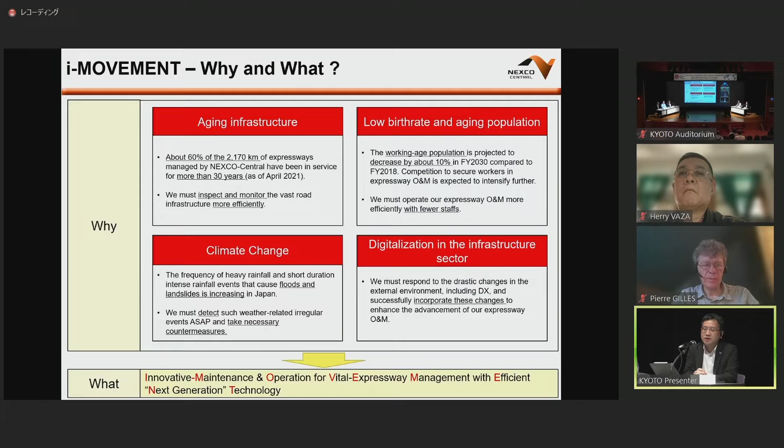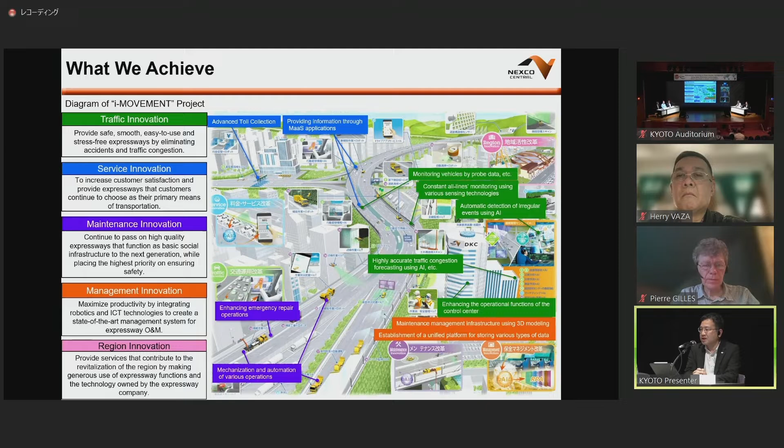This is related to the operation, including tolls of the highway, and we want to have a comprehensive transformation of the operations on highways and roads. So what's the future state or vision? It's a rather busy slide, but on the left side we are working on traffic innovation, service innovation including tolls, maintenance innovation, and management innovation. Hopefully we will have a ripple effect on the regions around the highways and roads, and that's what we want to achieve under I-Movement.

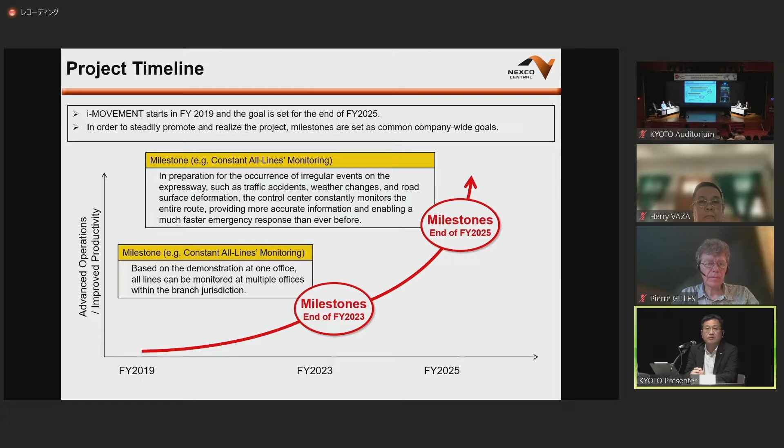All the initiatives in different areas have milestones, and we actually started working on I-Movement from FY19. By the end of FY2023 and 2025, we defined milestones such as constant all-lines monitoring. We set specific milestones to achieve by 2023 and 2025, and that's how we are working on this project.

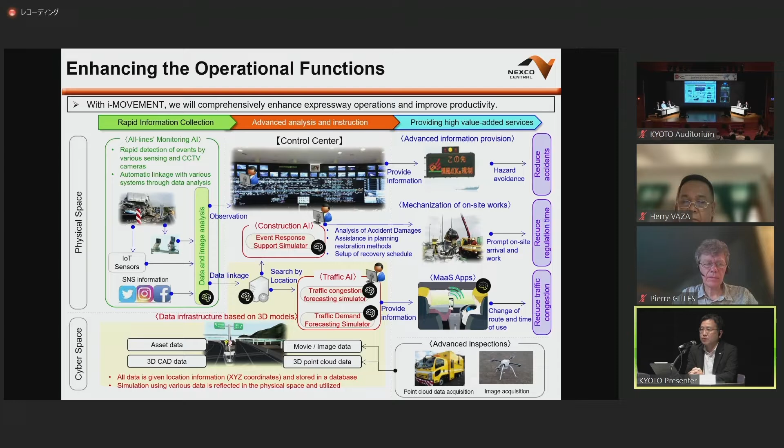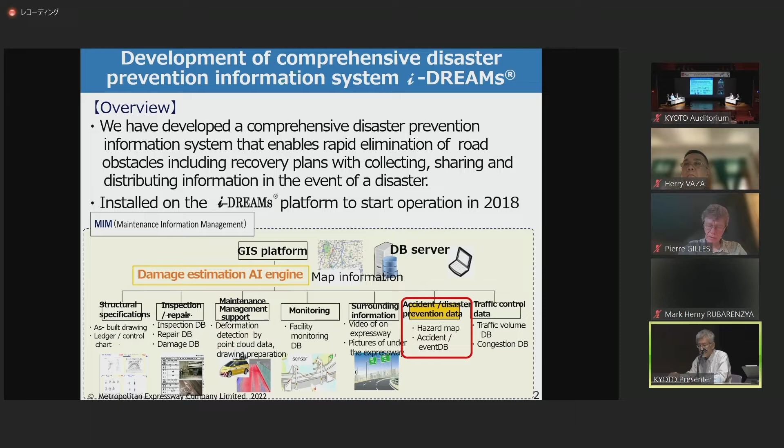Within the 2D management of i-DREAMs, as you can see in the red box, there is a comprehensive disaster prevention information system that stores accident and disaster prevention information. Sharing and dissemination of the information are done in order to achieve prompt opening of the affected roads. This shows the basic information and real-time information we have in this system.

Basic information is divided into four major categories: priority roads, risk areas where a road surface step could happen, the resistance status of surrounding buildings, flooding risk areas, emergency equipment deployment points, and earthquake information.

And there are five major types of real-time information. Later, I'll show you the video, but basically we can check the inspection progress, confirmation of local conditions, confirmation by video, and also mobile device information.

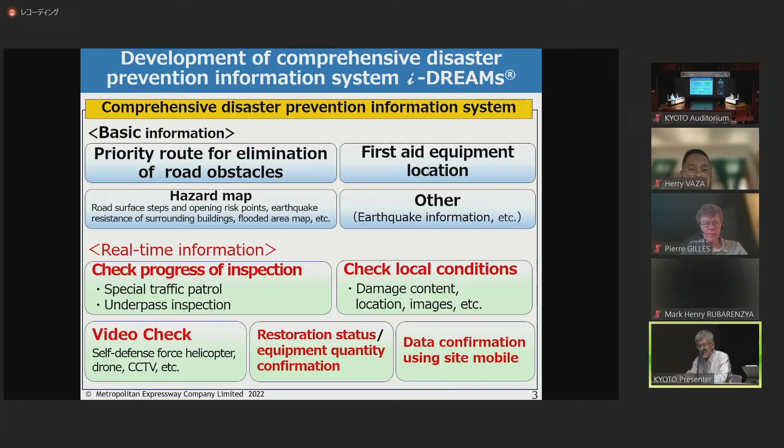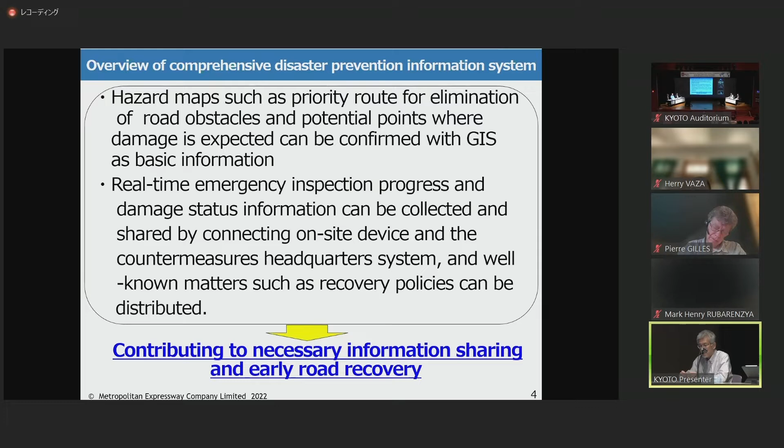By applying this comprehensive disaster prevention information system, it becomes possible to confirm hazard maps such as priority routes for road reopening and road surface step risks using GIS. In addition, by connecting on-site terminals to the system at headquarters, we can share real-time information and check the progress of inspections. This will contribute to prompt road reopening, including restoration planning.

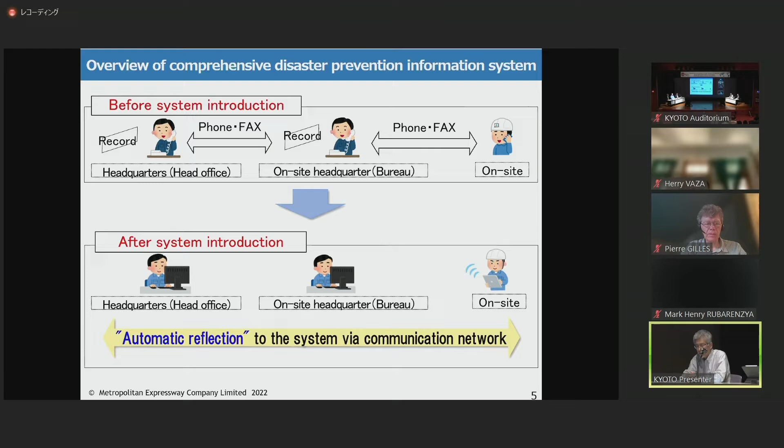This slide shows a simple comparison of before and after the introduction of the Comprehensive Disaster Prevention Information System. Before, we were using telephone and fax, but now we have the system in place, hooked onto the internet. So the same information can be shared instantaneously, and the information is synchronized.

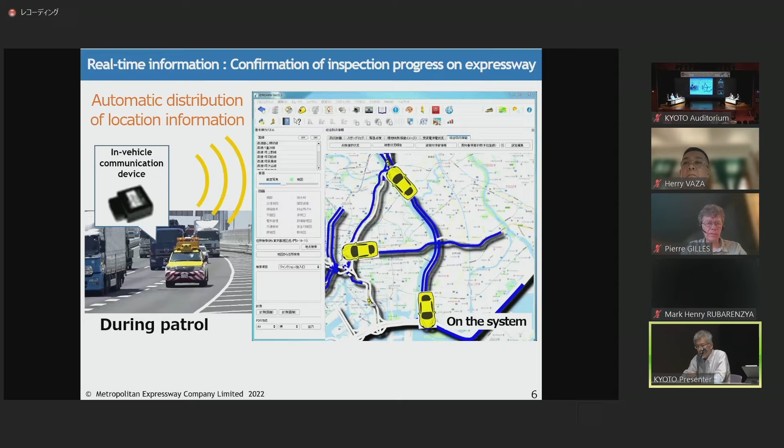So this is a movie showing the progress check of the inspection, a real-time confirmation. On the left is the vehicle, which is the communication vehicle, and the location information is disseminated, so on the map we can tell the progress of inspection work.

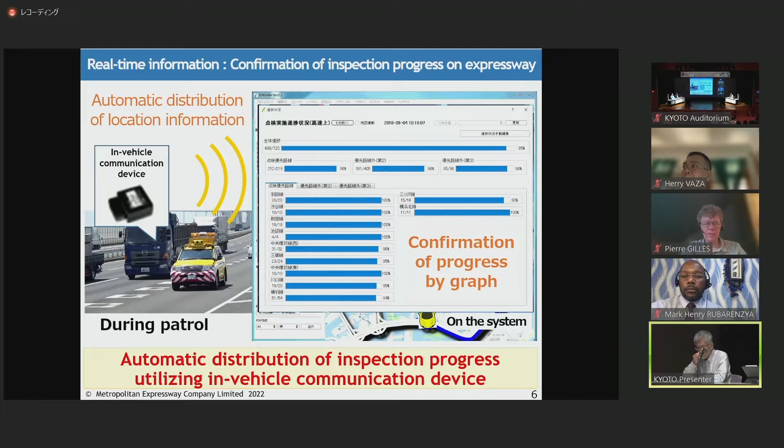Therefore, the delay can be detected, and once the work is completed, we can know that instantaneously, and swiftly we can reopen the road.

This is the same real-time information for structural damage check. The inspector enters the information of the damage, and on the system, as you can see on the right, it is instantaneously reflected. Therefore, accurate information from the site is shared at the headquarters. Next, please.

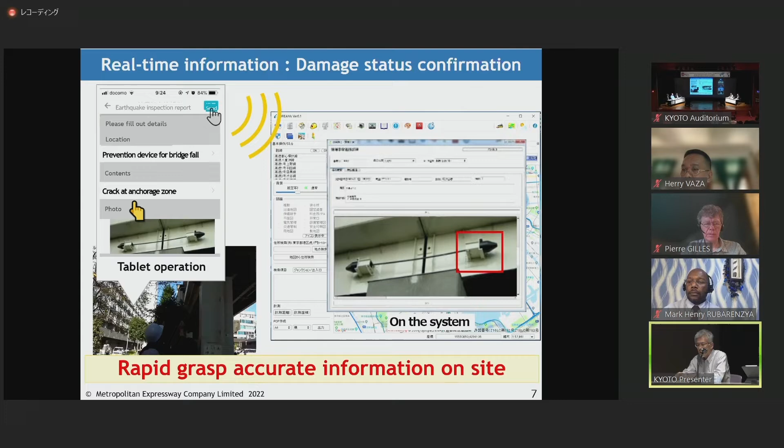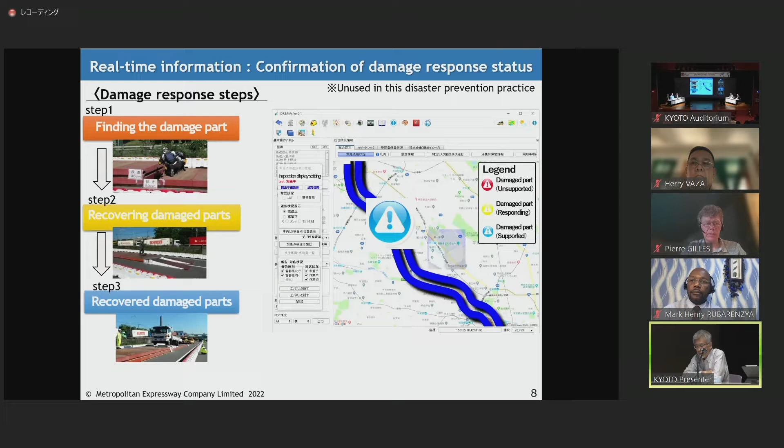This is the real-time information of the damage, same as previously. At each step, the information can be shared. Step 1 is discovery of damaged areas. Step 2 is the status of restoration work. Restoration of damaged areas is step 3.

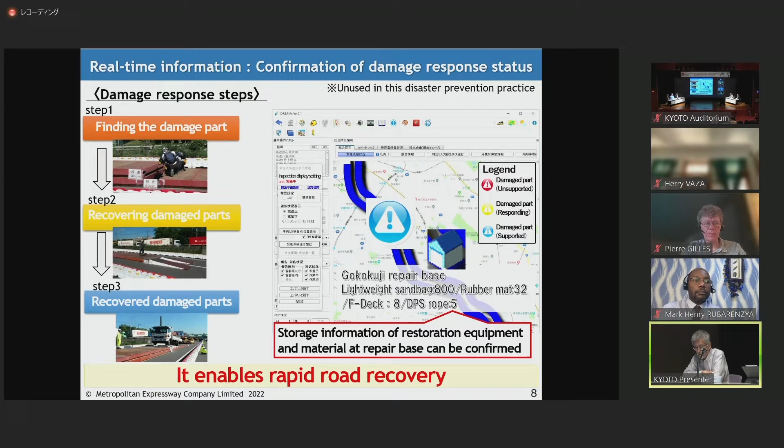So we can tell exactly where we can start the operation of the road by looking at the data.

This is just for your reference. The picture on the left is the real-time image from a drive recorder, so the patrol cars can send you information about damage on the road, and we can get such information very quickly.

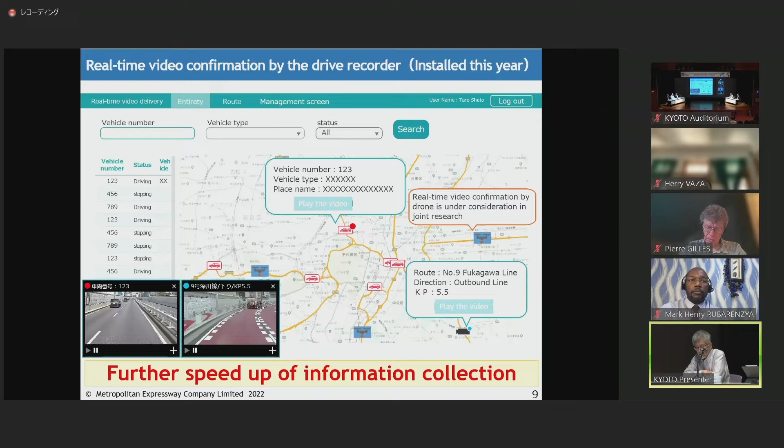This is one such example, also for your information. As has been introduced, drones are now being used. In the metropolitan areas it is difficult to use drones, but we now have a real-time image confirmation system, and we are doing joint research on this.

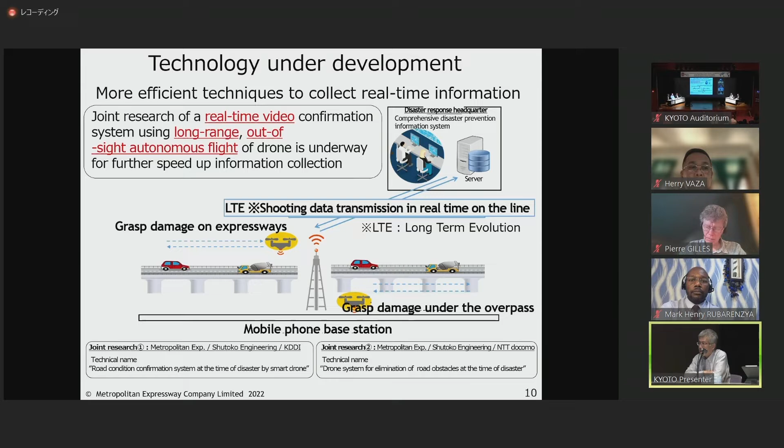The Metropolitan Expressway is designated as a relief lifeline, and therefore we have to improve road availability so that it can serve as an emergency transportation route.

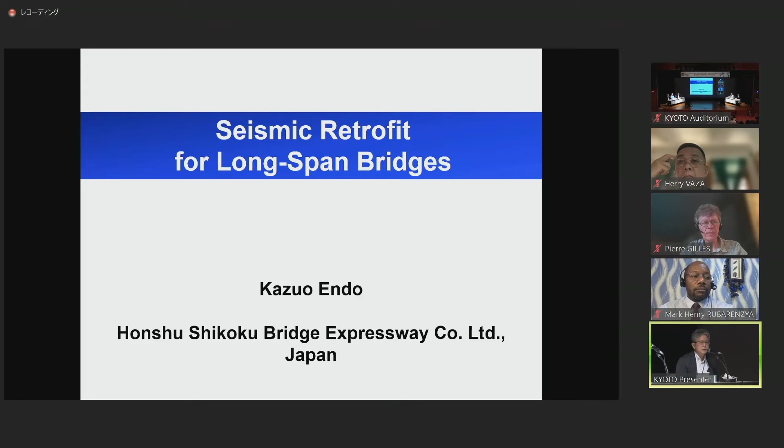My topic today is seismic retrofit for long-span bridges. Next slide, please. This slide shows the outline of the Honshu-Shikoku bridges, which our company operates and maintains. There are 3 routes between Honshu and Shikoku Island, composed of 17 long-span bridges, like Akashi-Kaikyo Bridge, upper right photo, and Tatara Bridge, lower left photo.

This bridge and the middle route are called the Seto-Ohashi bridges. This route is dual for highway and railway, while the other two routes are only for highway. These bridges were constructed step by step, and all three routes were completed in 1999, more than 20 years ago. The blue figures in the yellow boxes indicate the traffic volume, daily average, in last year. As you can see, the east route, Kobe-Naruto route, has the highest value, the middle route comes next, and the west route is the last.

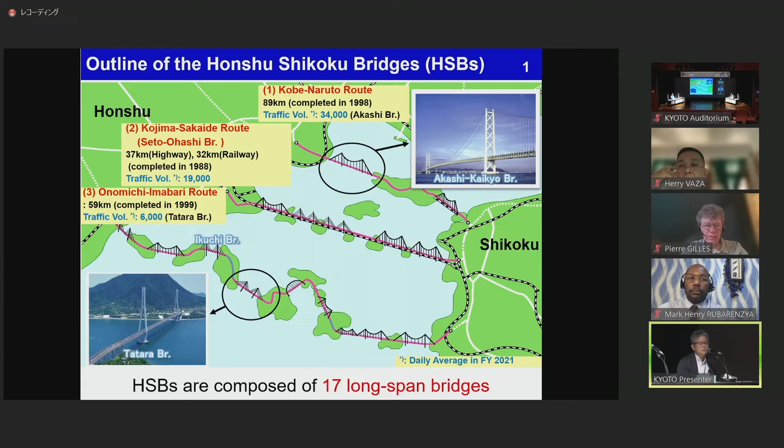Next slide please. This is the background of seismic retrofit. The Kobe earthquake in 1995 caused severe damage to many road bridges. After this earthquake, the Japanese seismic design code for highway bridges was revised drastically, and we were required to consider a strong inland earthquake like the Kobe earthquake.

But most of our bridges were designed before the Kobe earthquake, so we didn't consider inland earthquakes for the original seismic design force. According to the latest seismological evidence, seismic load exceeding the original design was estimated, so we can say that seismic risk is increasing.

The other point is the importance of our bridges. Of course a road bridge is important infrastructure, but especially our long-span bridges connecting interchanges across the straits are highly important because there are no alternative routes between the two islands. Our bridges are expected to act as a lifeline network for emergency transportation or restoration works after a large-scale earthquake. So under this background, we launched seismic retrofit work, and it's now underway.

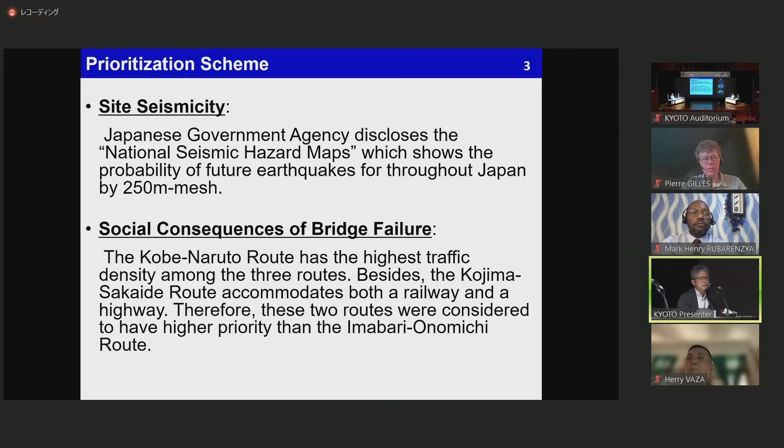Next slide please. Based on the prioritization scheme, the current seismic retrofitting strategy is as follows.

Next, I'd like to show you some examples of seismic retrofit of our long-span bridges. The first example is the case of steel truss bridges on the Seto-Ohashi bridges. The upper middle picture shows a cross-section of the girder, which is a double-deck structure: upper deck for highway and lower deck for railway.

The seismic vulnerability assessment shows that the middle chord, the red-colored member above the railway, got damaged. In order to secure safe railway operation, we needed to avoid reinforcing these members. So we adopted a seismic retrofit method and replaced the existing steel bearing with a new isolation bearing.

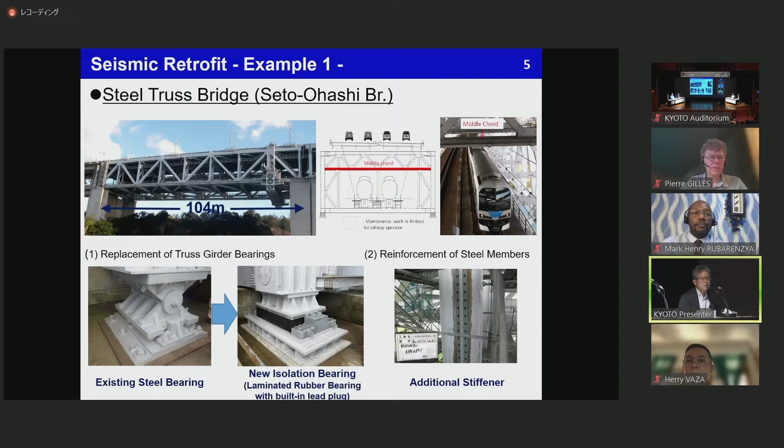Next, another example is a cable-stayed bridge with a main span of 490 meters. In cable-stayed bridges, how to control the girder movement in the longitudinal direction, like the upper right mode shape, is very important for seismic design. So we installed viscous dampers, like the lower left photo, to decrease the girder displacement through energy dissipation. We also applied carbon fiber sheet jacketing to increase the shear strength of RC piers.

As you can see, there is no general seismic retrofit method. We need to examine the seismic behavior of each bridge carefully and find the best solution on a bridge-by-bridge basis.

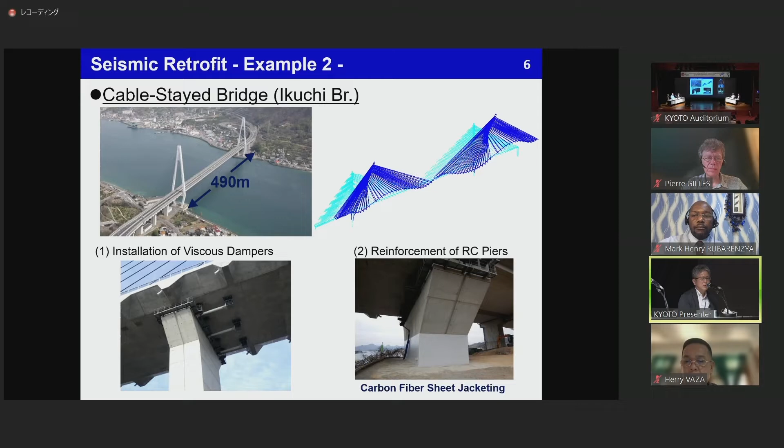I'd like to summarize my presentation. Past seismic events, such as the 1995 Kobe earthquake, caused severe damage to road bridges in Japan. It resulted in closing of road networks, which led to traffic delay as well as indirect economic losses.

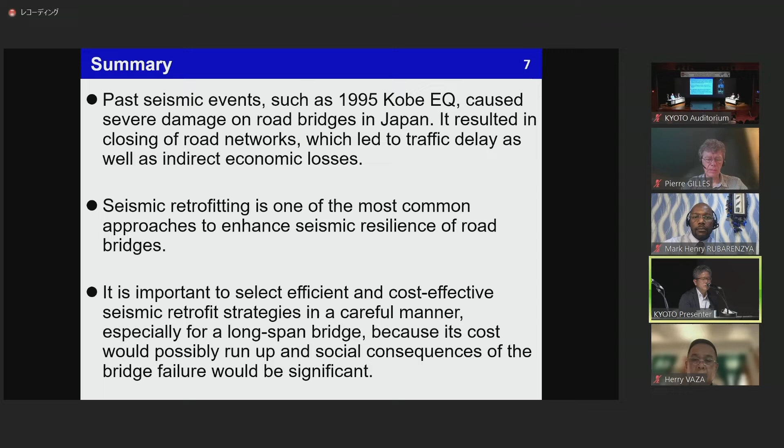The second point is that seismic retrofitting is one of the most common approaches to enhance seismic resilience of road bridges. It is important to select an efficient and cost-effective seismic retrofit strategy in a careful manner, especially for long-span bridges, because the cost would possibly run up and the social consequences of bridge failure would be significant. Thank you for your attention.

Thank you, Endo-san, nice presentation. At this time I need to apologize because I didn't talk about the theme of this roundtable discussion.

So the theme of this roundtable discussion is what are the strategies and the tools for disaster management or disaster resilience. We are discussing what kind of strategies and tools they have to be proud of in road disaster management. Now we've finished the three proud technologies and strategies of the Japanese highway companies, so now we'd like to have another strategy and tools from Indonesia.

So Herry, are you ready for the presentation? Yes, I am. Okay, so please.

Have you seen my paper? It's coming. It's coming but not yet. Okay, not yet? Not yet. Okay Herry, could you shut off your screen sharing, okay. And yes, we'll do it. Okay, thank you. Yep.

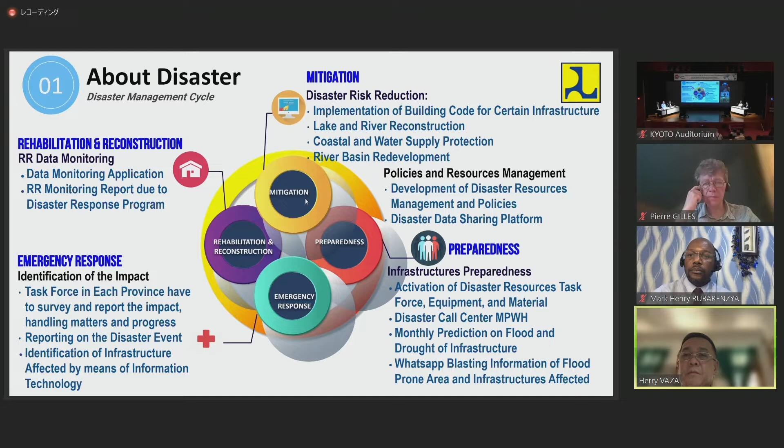There are 5 stakeholders related to disaster in Indonesia. First is Ministry of Energy and Mineral Resources, who have information about landslide, volcano and seismic data. Also we have LAPAN, the National Institute of Aeronautics and Space, responsible for imagery data. And we have BIG, the Geospatial Information Agency, responsible for preparing big data for Indonesia. The fourth one is the Disaster Management Authority, who will coordinate all the ministries and agencies when a disaster happens. And the fifth one is the Agency for Meteorology, Climatology and Geophysics, who prepare data about earthquake, rainfall, and other data.

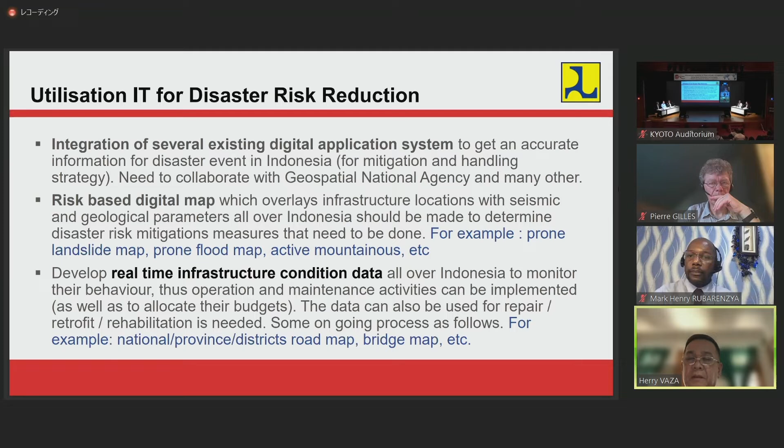Utilizing IT is important in management. First is the integration of several existing digital information sources that I talked about before, to get accurate information for disaster response. Second is a risk-based digital map, which overlays infrastructure location with seismic and geological parameters. Third is to develop real-time infrastructure condition data all over Indonesia to monitor their behavior, as well as operation and maintenance activity.

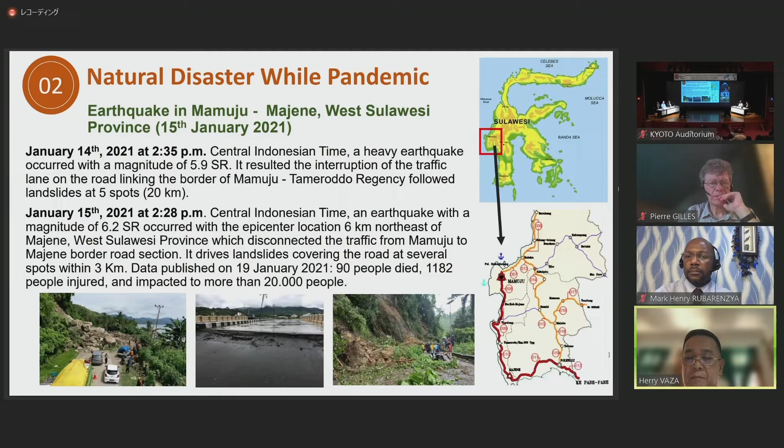During the pandemic, we had at least 2 big disasters. One is the Mamuju Majene earthquake that happened on the 14th and 15th, 2021, with magnitudes of 5.6, 5.9 and 6.2, which caused 20 kilometers of road to be damaged, affected more than 20,000 people, with 1,200 injured and 90 people dead.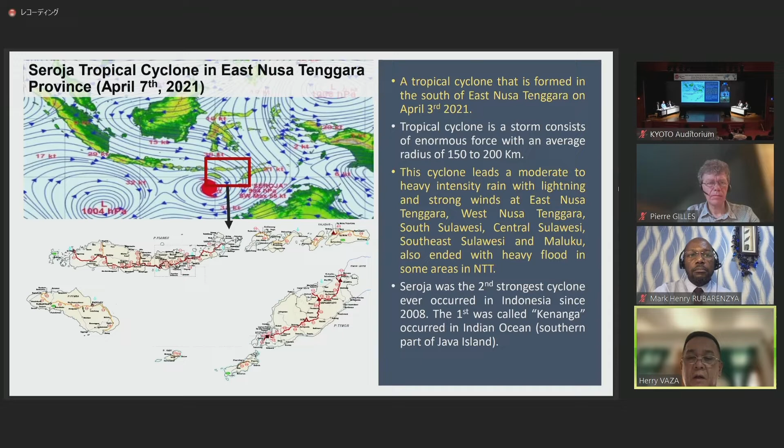After that, 4 months later, we also had a big cyclone in April 2021. This cyclone in Nusa Tenggara created a terrifying storm with high rainfall, lightning, and strong wind with a radius of almost 200 kilometers. We call it the Seroja cyclone, the second largest and strongest cyclone in Indonesia. It was powerful enough to cause about 300 millimeters of extreme rainfall per day, and hurricane-force winds at the tropical province. Floods occurred everywhere due to the high rainfall, and this cyclone affected a number of regions in East Nusa Tenggara province. According to the National Disaster Management Agency, by April 9 the cyclone had caused 208 deaths.

Our ministry is committed to completing infrastructure development to maintain the sustainability of economic activity while we are in the pandemic. We are fully aware of the importance of good infrastructure in realizing a good economic environment. The Regional Office of the Ministry of Public Works and Housing is well prepared for future possible disasters. We have certain experience during the pandemic that we cannot ignore.

We had limited movement, as you may be aware, because the government restricted movement. The second issue was a policy imposing restrictions on communication. Third was a shortage in manpower because of that, leading to slow delivery of construction materials. The fourth is the shortage of logistics caused by disconnected transportation and communication networks, which led to an absence of fuel supply. Based on these lessons learned, we propose the following for future Indonesian risk reduction management.

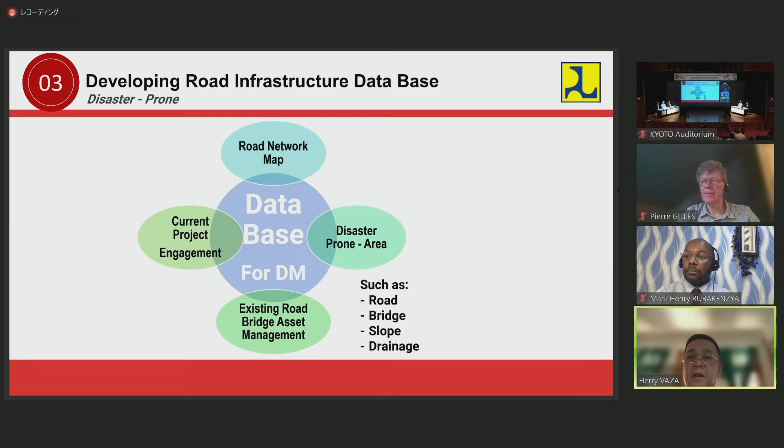We think we should collaborate between data that has been collected among our institutions. We try to build a good database in case a disaster happens.

Firstly, we should have a road network map, and also material supply data. Then we should have road operator and person-in-charge contact data for each road segment. Third, we should have a map of disaster-prone areas from the National Disaster Agency. Then we should have a road database, especially for bridge condition, slope and drainage, and also contractors who work in that area, so that in case a disaster happens, we can call them for help.

Points 6 and 7 are heavy construction equipment information, which is needed for direct deployment to the field when a disaster occurs, as well as the disaster relief unit that belongs to the Ministry of Public Works.

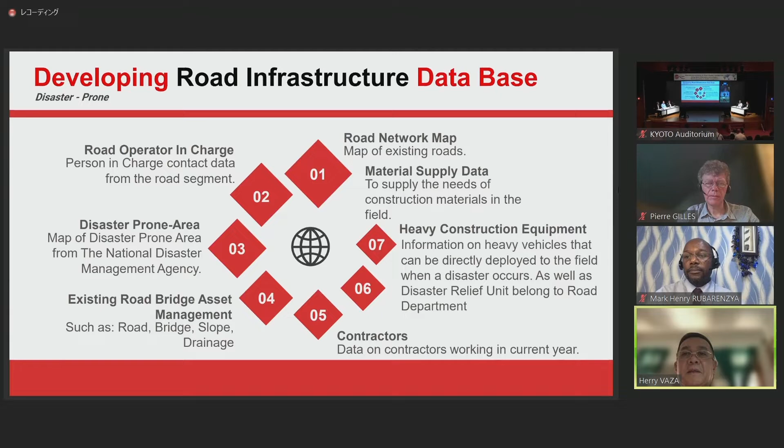Thank you. I think that's all for the future of our Indonesian scheme for road disaster management, learned from the pandemic. Thank you very much.

Thank you very much, Herry. I think the keywords of your presentation are digital technologies and the pandemic. Okay, so I would like to call the next panelist, Mark Henry Rubarenzya. Thank you very much for joining on time. Mark is the head of research and development at the Uganda National Roads Authority, and he is also the vice president of PIARC. So Mark, it's your time.

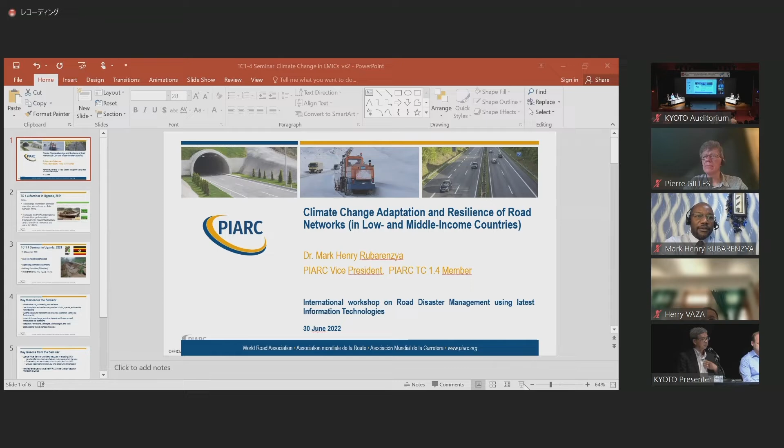I'm going to give key lessons we picked from an international seminar organized by TC 1.4, on climate change, adaptation, and resilience of road networks, focused largely on low and middle income countries. We'll cover the highlights and some tools that were presented.

The seminar had about 4 goals, but the key one was to exchange information between countries with a focus on sub-Saharan Africa. Earlier presenters mentioned the importance of sharing information with low and middle income countries, so for this seminar we zeroed in on sub-Saharan Africa.

Second was to discuss the PIARC International Climate Change Adaptation Framework for road infrastructure and identify its relevance and value for low and middle income countries, in light of the fact that this framework is currently being updated by TC 1.4. We wanted the views of low and middle income countries to ensure we're addressing their needs and that they perceive its relevance and value, which will ensure uptake.

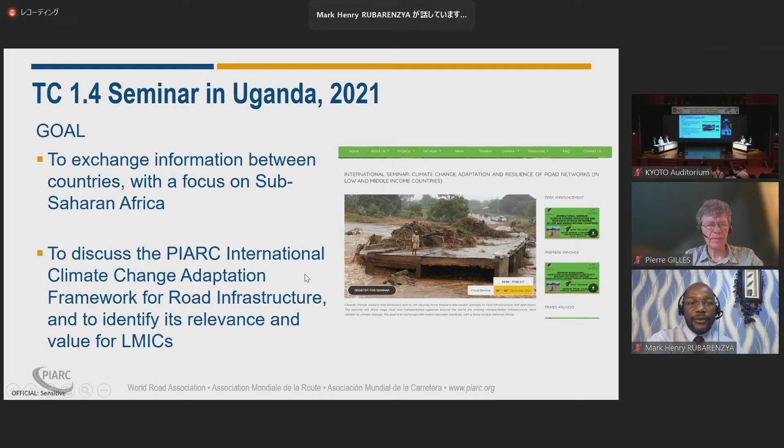The seminar took place between the 6th and 8th of December 2021.

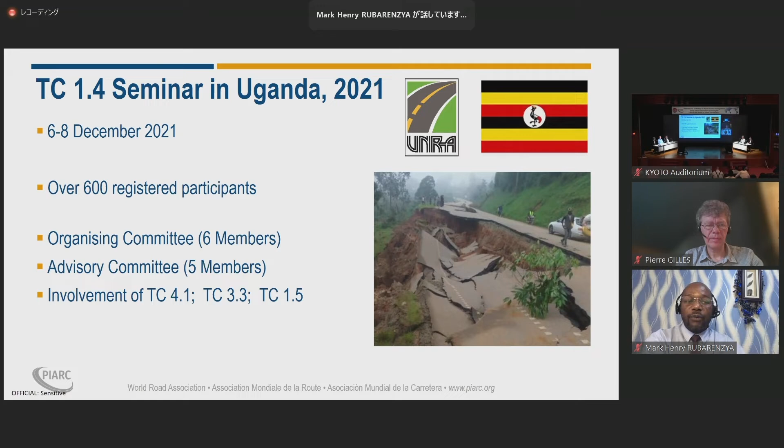It was very well attended, with about 600 registered participants, and it took some effort to organize. We had a big organizing committee of 6 members, supported by an advisory committee of 5 members, and got participation from 3 other technical committees we're very grateful for: TC 4.1, 3.3, and 1.5. So this was a truly PIARC-wide seminar.

Key themes discussed in the seminar briefly: infrastructure risk, vulnerability, and resilience; the use of adaptation and resilience approaches to build, operate, and maintain road networks; and building capacity for adaptation and resilience, focusing on social, economic, and environmental aspects — moving away from the hard to the soft, so to speak.

We looked at the impact of climate change and other hazards and threats on road infrastructure and operations, using particular case studies to see how that is realized. We looked at adaptation frameworks, strategies, methodologies, and tools — one of which was actually developed in sub-Saharan Africa through a research program there. It was good to see various frameworks and tools and the synergies, and how we could improve the PIARC one going forward. We also looked at strategies and tools to increase resilience.

So what are some of the key lessons? I'll take you through these quickly. One, the Uganda virtual seminar was considered a big success in engaging low and middle income countries. This international seminar was effective in engaging local experts from the private sector, public sector, academia, and multilateral development banks. The African Development Bank was very active, and we're happy to have reached right across the spectrum of key stakeholders in this space.

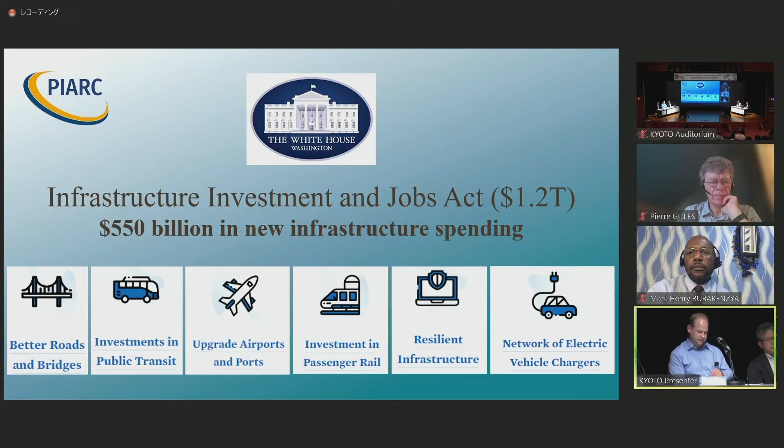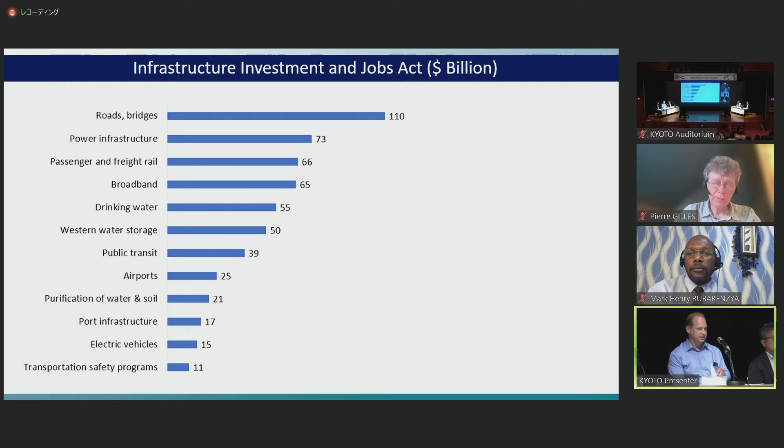So beyond the direct investments in transportation that I mentioned, we're also investing in other areas of critical infrastructure that directly impact transportation system operations, like power infrastructure and distribution and broadband high-speed internet connectivity, all with a focus on sustainability, resilience, and also social equity. Next slide, please.

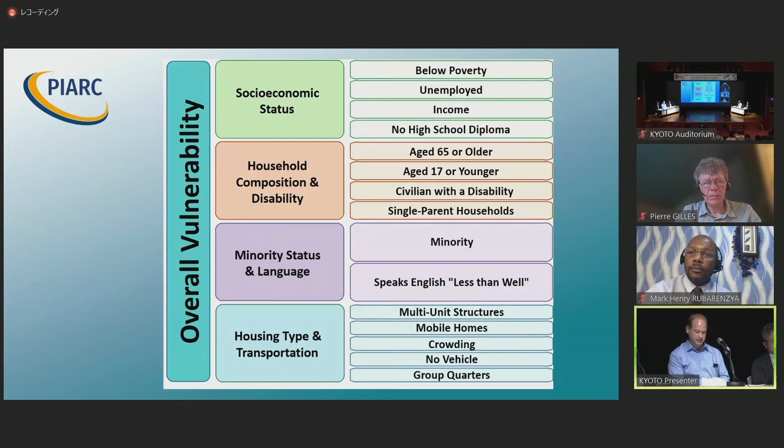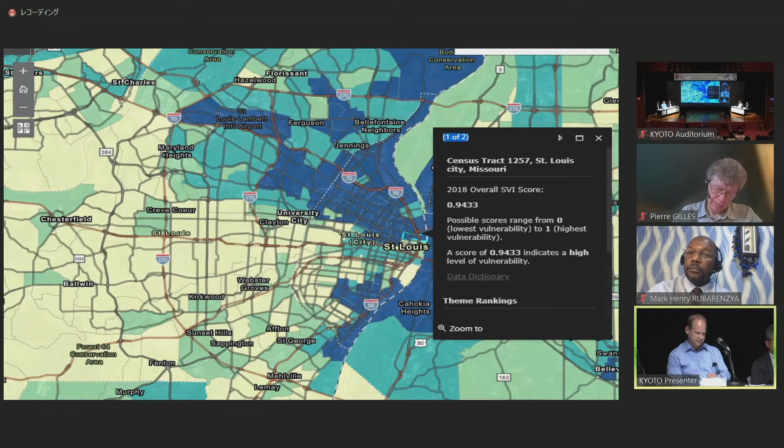We can use the databases and maps to estimate needs for supplies, whether food, water, medicine, or bedding. It also helps determine the number of emergency personnel required during a disaster. We identify needs for emergency shelters based on income levels and community composition, and assist with evacuation planning, accounting for special needs such as people without vehicles, the elderly, and people who do not understand English well. It also identifies communities that need continued support to recover following an emergency or natural disaster.

This planning tool can save emergency managers valuable time before, during, and after a disaster by providing important information to help make decisions quickly. That is my presentation, so thank you very much.

Thank you, Chris. It seems your presentation had the word 'community' a lot. Okay, thank you very much. Thank you for waiting, Pierre. Now the time is yours.

Okay, hello everybody. I expect that you will be able to see my screen. Is it okay for you? It's coming, not yet. Yes. You see it, but I don't see it anymore.

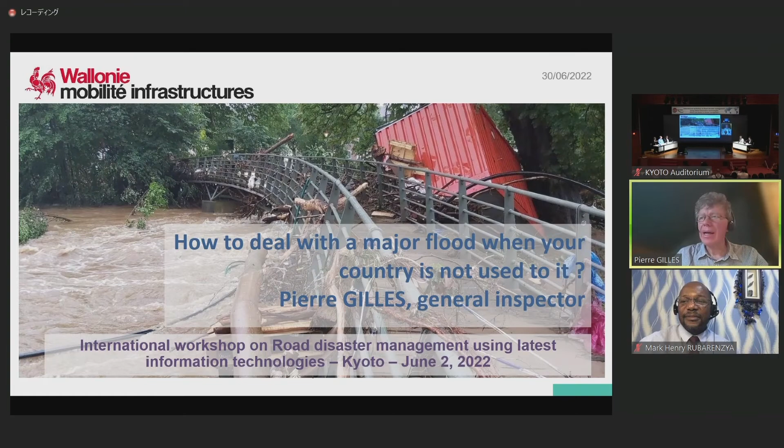I came from Belgium. Belgium is a small country in Europe, in the center of Europe, and we are not used to having big disasters like other countries, such as Japan, for example. We don't have any tsunami, earthquake, or landslide. So we have, of course, some disaster authorities who can manage some disasters, but not especially strong disasters, and we don't have anything specific for bridges.

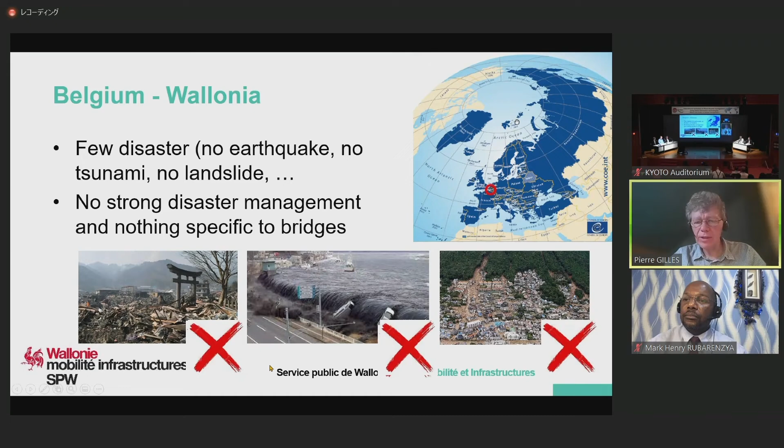Last year, on the 15th of July, we observed very heavy rains, about 300 millimeters in 3 days. This was very significant for Belgium, where this region typically gets about 700 millimeters per year. We observed that the return period was about 200 years, so this was very strong for us. The river flow, especially in this place, rose up to 4 times the normal maximum flow, and finally we observed 39 fatalities during this disaster.

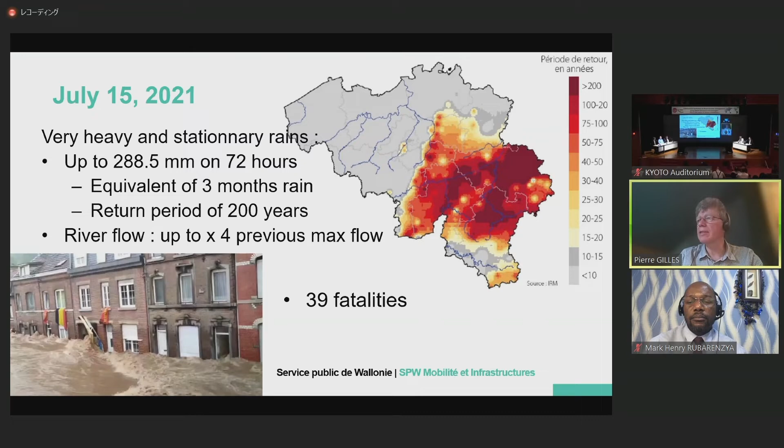I will focus on bridges, because I am also part of the TC Bridge Committee. As already explained during this roundtable, bridges are important in the network because emergency traffic wants to use bridges, but they need confidence that they may cross them. We had a very great number of bridges to inspect, and many people wanted to know the bridge condition, but we had no tools. I see that many countries, Japan, Indonesia, have platforms to share data and information, but we don't have this kind of platform.

So in fact, we built this in a very few days, because 3 days after the disaster, we were able to start collaborative work using about 40 people who had to inspect all the bridges. We used a shared Excel table, something very easy, put on SharePoint so everybody could put data in this shared file at the same time. Hopefully this is easy to do using Office 365.

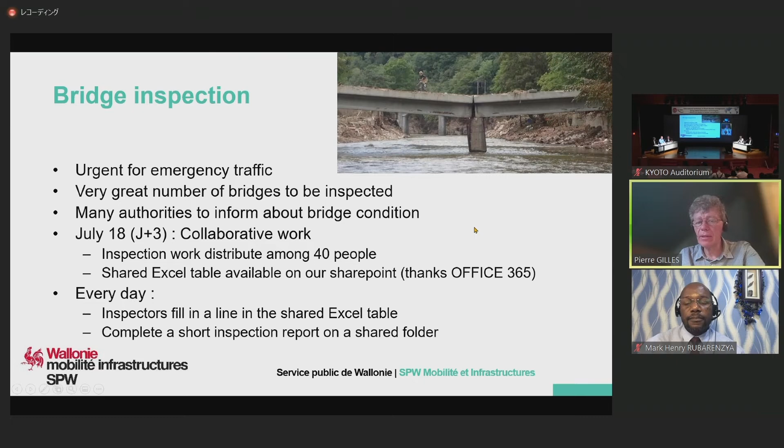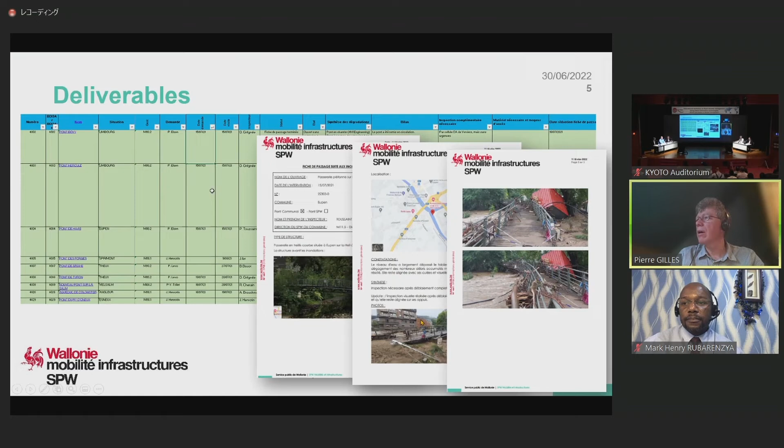We asked that every day the inspector fill a line in the shared Excel table, and that we complete a short inspection report in a shared folder. So if you look at how it could appear, this is an Excel file, something very classic, and after that we have an example of a very short report with a short presentation of the bridge, where it is, some views, and some comments on the disaster.

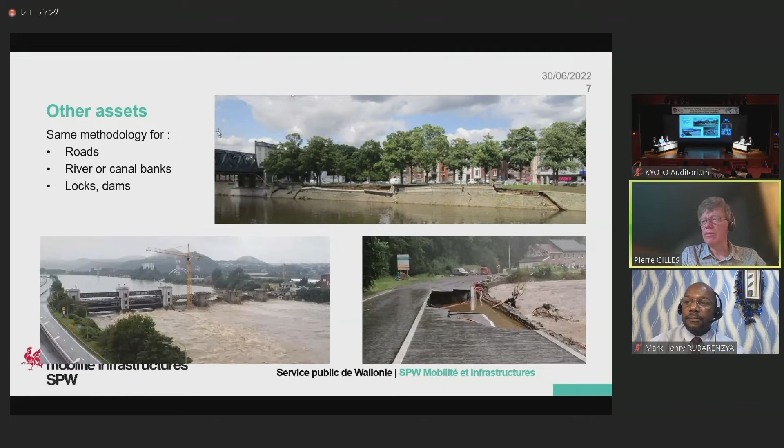It's quite important to have access to a geographical view of all this information. So we made an automatic connection between the Excel file and a map using the BatchGeo application, and this view was very easy to access by everybody, the authorities, the municipalities, the emergency services. When you click on a bridge, you can see short information about the bridge condition. We made the same for other assets like roads, river or canal banks, and locks or dams that were also affected by this disaster.

As a conclusion, we didn't have any standard methodology, but we worked in a very collaborative way. This was possible due to the fact that we have some tools nowadays to do that. The information was available directly when it was put in. This was also very important.

In one week, we inspect about 150 bridges. Actually, we inspected about 560 bridges which were affected by the flooding. We completed all these inspections with about 100 divers inspections, which was also very important. And the consequence of this flooding was that we had to rehabilitate or reconstruct about 150 bridges.

Last point: here we worked a little bit outside of our standard bridge database. So now we have an important back office job to do, which is to put into our bridge database all the information that we collected on this alternative way that we had to construct in order to manage this disaster. That's it.

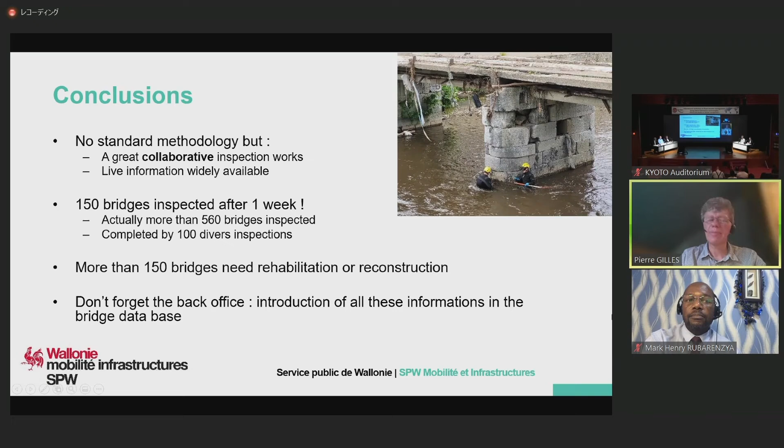Thank you, Pierre. So now the presentations by the 7 panelists are finished. I have 10 minutes, so I'll make a rush to the discussion. I found some keywords during their presentations.

The first one is digital technologies. I would like to know how other countries are making the effort for digital transformation in disaster management. I would like to ask this question to Endo-san. You are the bridge specialist of Japan. So what kind of digital technologies are applied to your bridges for disaster management?

Actually, the effort our company is working on is almost the same as a Japanese expressway company. In terms of the bridges, we are doing health monitoring for seismic events, and we install several seismographs, acceleration meters, displacement meters, and velocity meters to evaluate the bridge condition in a short time after a big event. Yeah, that's it. Thank you very much.